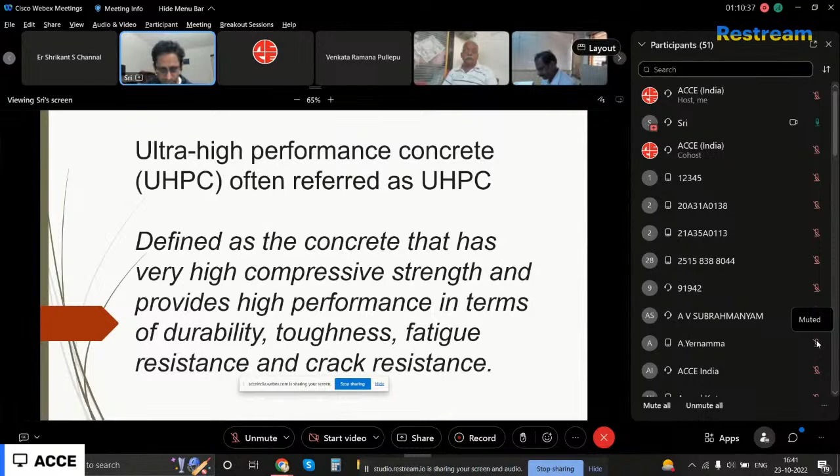So this is the statement I was trying to emphasize. It's relatively very new material. I mean, what is new in research, or what is new in civil engineering? Something that is 20 or 30 years back is not old at all. An idea that started 30 years back is considered new, even in French labs.

The reason is we are scientists. We want everything scientific and proved, and that's the job of researchers: to bring a new idea, test it out, verify the results, see its applications in different areas, identify the problems, and come out with solutions that mitigate them, eventually producing a concrete that is a lot better, and see if it works long term. Then the engineers and industry take it out and implement it on a large scale. That's how it works.

There is a huge gap in between these two. It takes significantly long, many years. Pre-stressing, we started using probably in the last 10-20 years, but pre-stressing was actually proposed around the 1950s, again by French people. It takes 40 to 50 years for people not only to test, implement, and verify it, but also to overcome the stigma of accepting superior new things, because we don't know them.

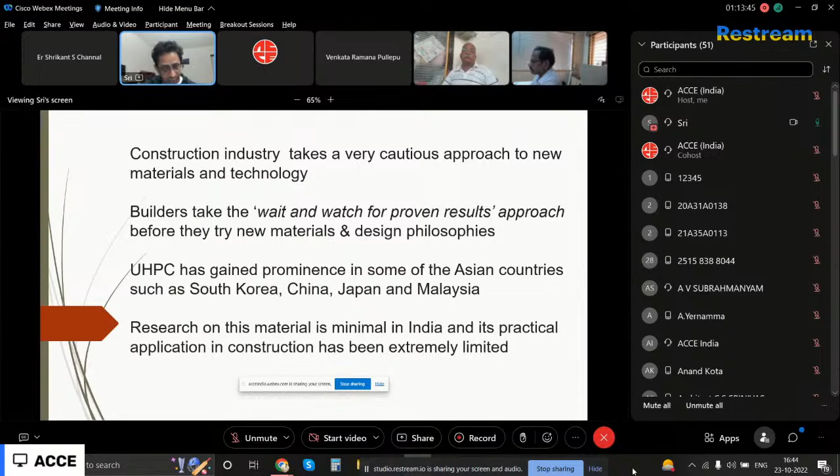This slide talks about what I already spoke. What was considered M50, achieving M50 was a challenge a few decades ago, but now we are already talking M125. Technically, as per the American Concrete Institute definition, for a concrete to be called ultra high performance, it's around M120—basically converting the units, that's about 20,000 psi, which is M120 grade.

That's where you technically call it UHPC. Otherwise, it's not UHPC, but it's probably not traditional concrete either. Traditional concrete definitions end around M50, M60. So you're falling in that zone between traditional concrete and UHPC concrete, between M60 and M120.

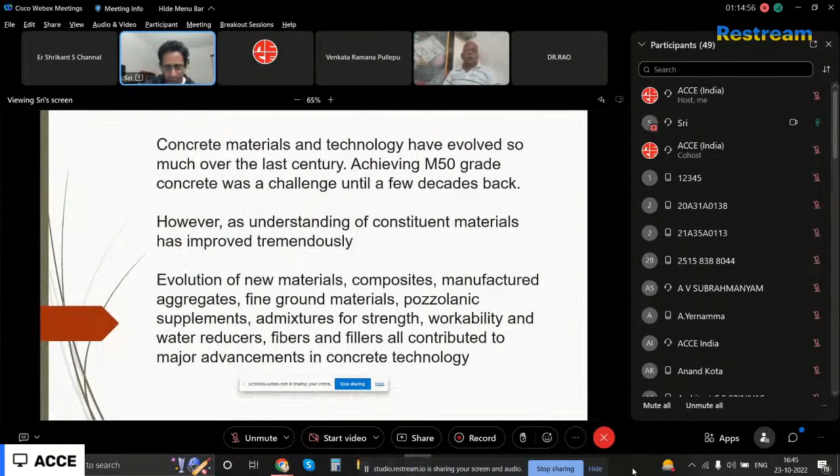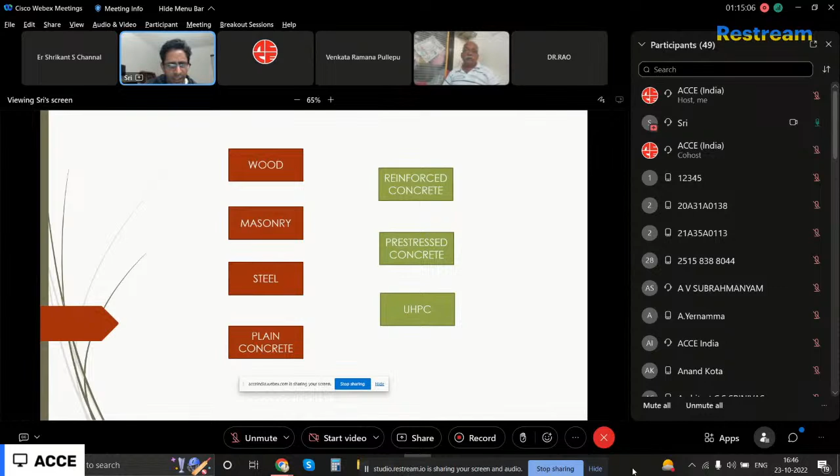Coming to the evolution—we can skip this, many of us know how we arrived at a point where we are talking about UHPC and these things.

Common ingredients: we all know cement, sand, water reducing admixtures. I think we have been using silica fume also in some mixes. Silica fume is commonly used to enhance the strength and properties of concrete—even mixes using M40, M50 also use silica fume. And then something interesting here is quartz flour. That's the important point right there.

When we see here, so quartz flour. You might be surprised that there is something missing here. Can anybody notice what it is? If you see this thing, common ingredients: Portland cement, fine sand, silica fume, quartz flour, water reducer, steel fibers.

What is missing here, essentially, from a traditional concrete? Aggregates? Yeah, the coarse aggregate. Yes, coarse aggregate. You don't see coarse aggregate here, essentially. So, it's not a formula I'm saying, but this is one of the most commonly seen mixtures for UHPC. So coarse aggregate is missing. That thing caught my attention actually.

Why are we missing coarse aggregate? Is it not added every time? I don't say it cannot be added, but adding coarse aggregate can potentially reduce the density. How good the pack is, how well it's consolidated into one piece, when you put all these materials together.

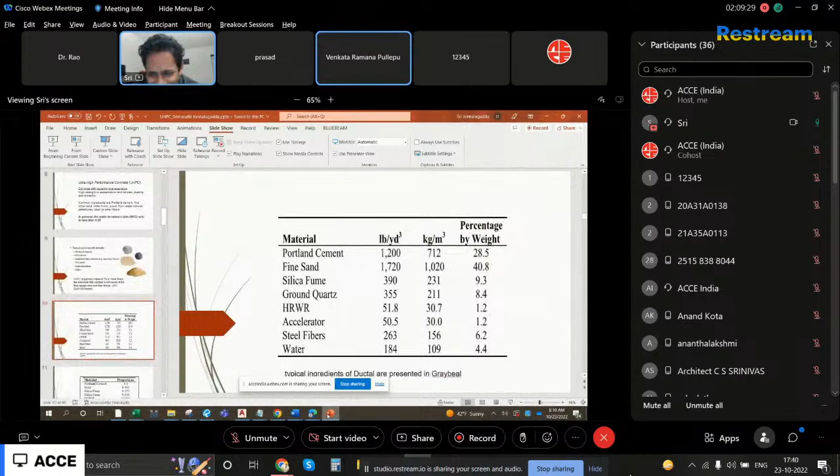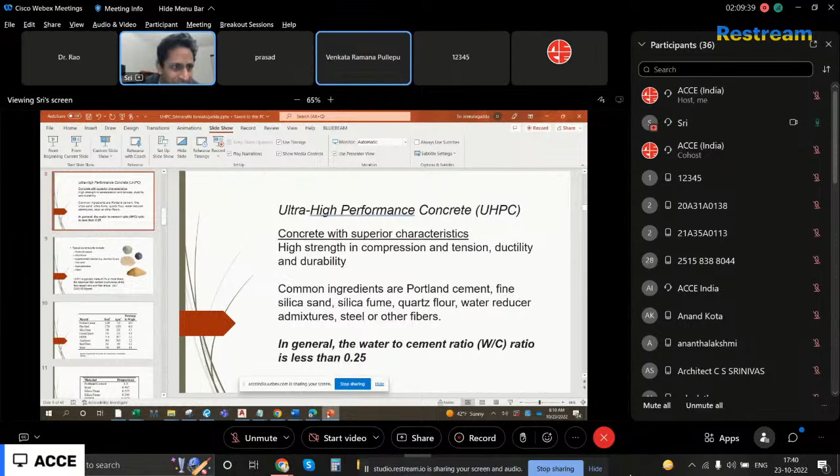If you permit me, I'll just very quickly go through it. I don't talk much into the slides, but I will just - okay, go ahead, sorry for the interruption. People will curse me, people will curse me, this guy didn't even talk fully about anything.

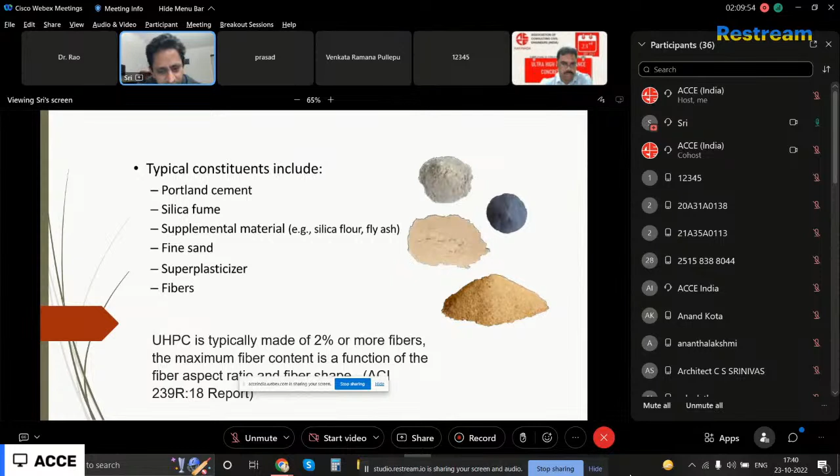So, 2% fibers - please, around 2% fibers is what many books typically refer to, 2% of the volume of the mix is something suggested. Then this is one UHPC mix, proprietary mix actually.

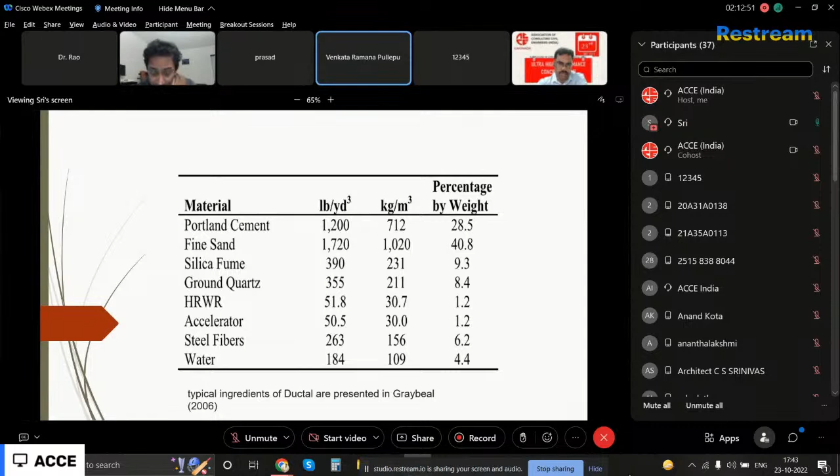I didn't know that, sir. Silica is a very polished surface, so it acts as a lubricant within the gaps of the particles. Besides that, it is in the amorphous form, sir. Yeah, glassy structure, highly amorphous form. Like a powdery kind of texture, essentially.

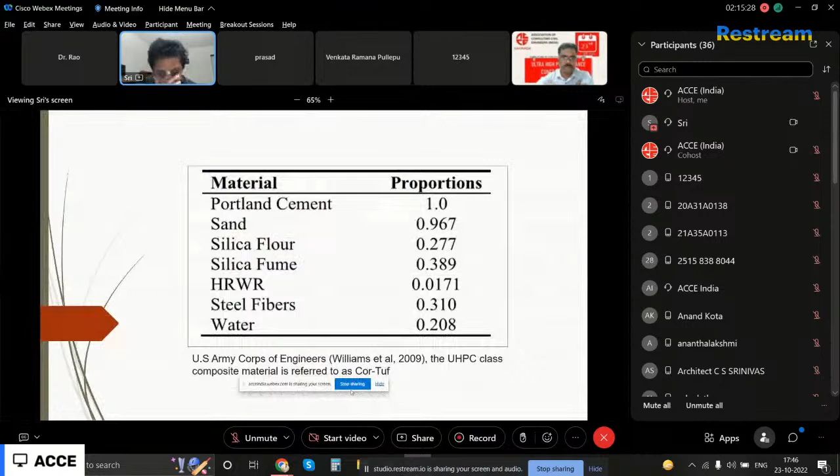One more advantage of this ultra high performance concrete, especially with the addition of steel fiber, is we can use it at a great advantage in pre-stressed concrete structures where we are thinking of getting a very high shear strength. I've recently seen somebody constructing a structure utilizing shear strength increasing it to about 10 Newton per mm square. When you increase shear strength of concrete to 10 Newton per mm square, your crack width reduces. Usually we restrict crack width to about 0.2 mm in pre-stressed concrete. This high shear strength lets us go for a slim section with reduced crack width.

There is one more advantage. Is this Mr. Prasad Garu talking? Thank you, Prasad Garu, you gave me an opportunity to skip to that slide. Actually, now I'm going to that slide because of you. So go ahead, I can just quickly go there.

That is the most important advantage from a designer standpoint, from an engineering standpoint, really. So I would talk a little bit about this slide before I go further. I want to talk about this slide, a very important slide.

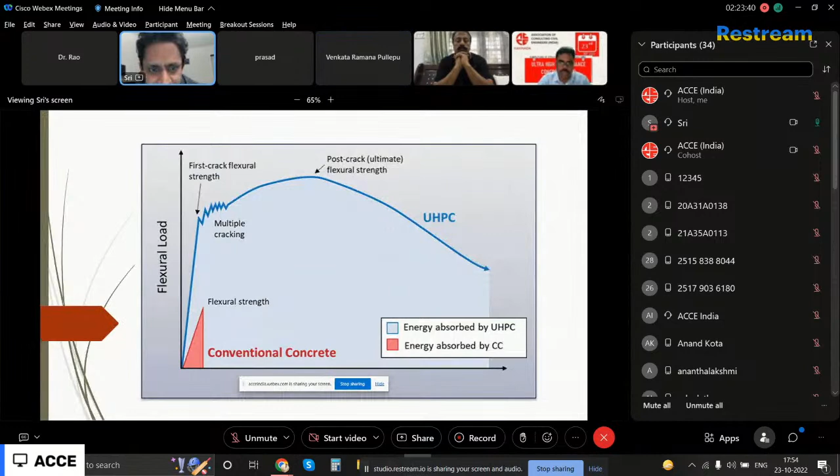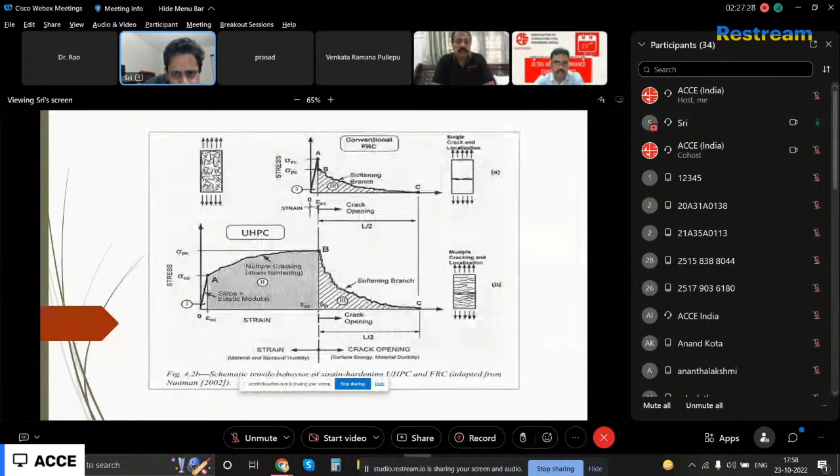It's okay, sir. I'll send you if I find that plot. No problem, in my literature if I find it, I'll send it over. I have written a paper on this one, I'll look at the paper also, that is much more detailed. I have a research paper on this one. I'll definitely send it.

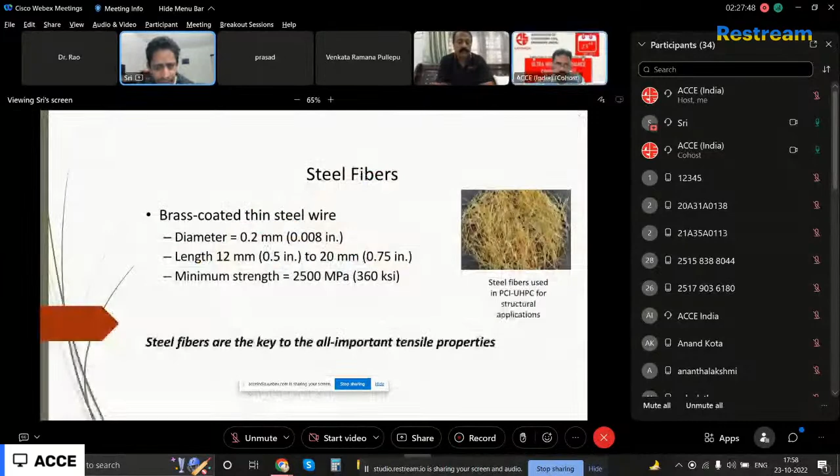There are a few questions in the chat box also, sir. One moment, before I just want to see. Yeah, this is, I think Dr. Rao Garu, you asked a question on what is the micro strain levels because of shrinkage.

Traditionally, you can probably have tensile stress before cracking, which is the most important part of a design to decide how much steel goes into the structure, which Mr. Prasad Garu, you were asking some time back. So how do you decide? Take it like approximately 2 to 2.5 times your tensile stress before cracking is more than conventional concrete, essentially.

So in conventional concrete, probably 600 psi, which is... give me 1 second, 600 psi is how many Newton per millimeter square? 600 divided by 145, you get around 4 Newton per millimeter square, approximately.

The permissible tensile stress in concrete is approximately 4 Newton per millimeter square. Given that tensile strength for UHPC is more than for high performance concrete, we can use UHPC for more slender members than traditional HPC.

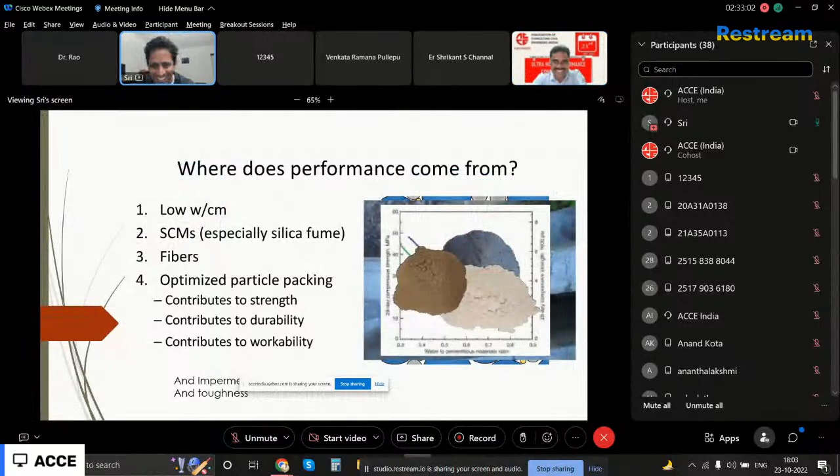Babu Mahesh has a bunch of questions in the chat box. Babu, you can call me anytime to discuss all these questions. People are waiting here, Babu. We don't have to follow a formula, we need to know everyone. Can I have a small last question from me? Yes sir, it's not going to ask the questions, we have the questions, only one small doubt.

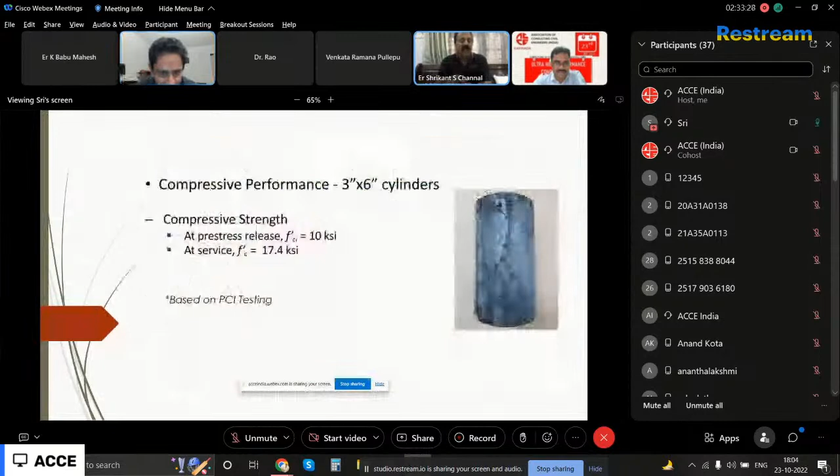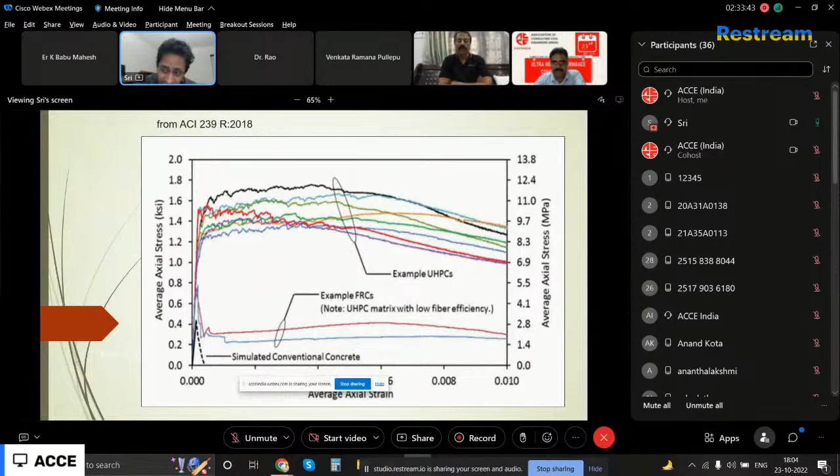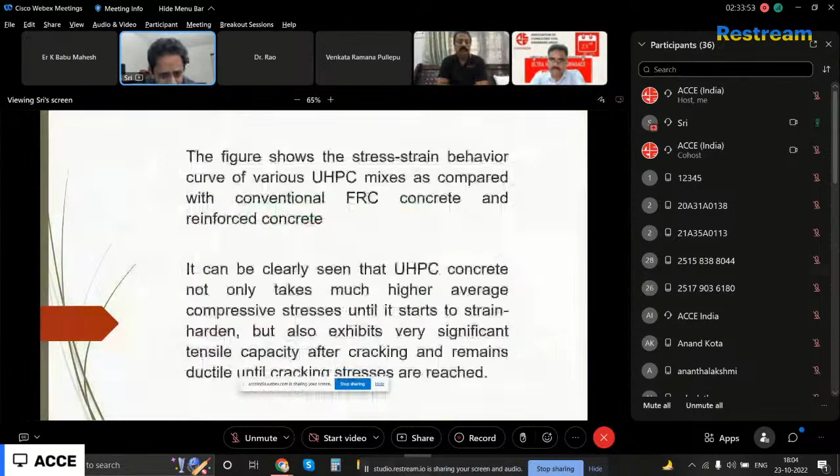You have shown that flexural curve, but did not show the tension curve also - is it available? This is the tension curve, sir - this itself. Okay, this is average axial stress. They didn't mention tension here, but this is tensile stress. On the right side vertical axis, this is tensile. This is flexural - stress deflection to flexural stresses. If I find the compression curve, I'll send that definitely.

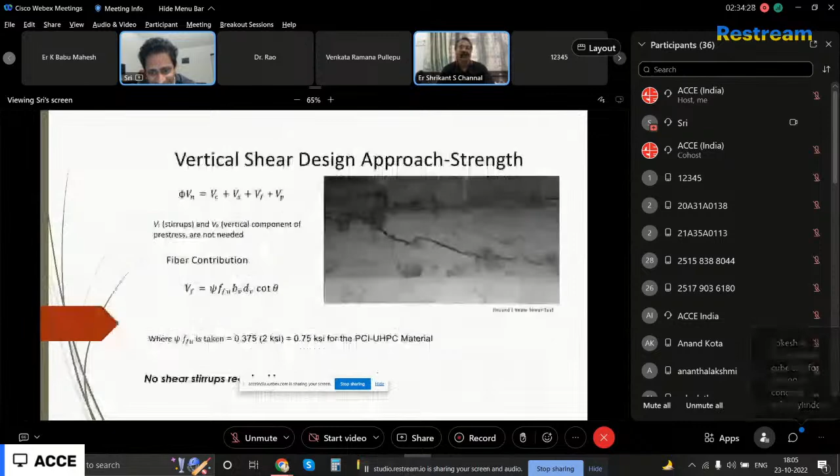Okay, fine sir, I think it is quite informative because it is going to be a new material and we all have to learn this thing. Otherwise we will not be having any alternative for the future - we will be thrown out of the field if we don't learn it. So it is good that Kakinada Center has chosen this topic. I am really thankful to Sundara Rao as well as the secretary. Thank you very much.

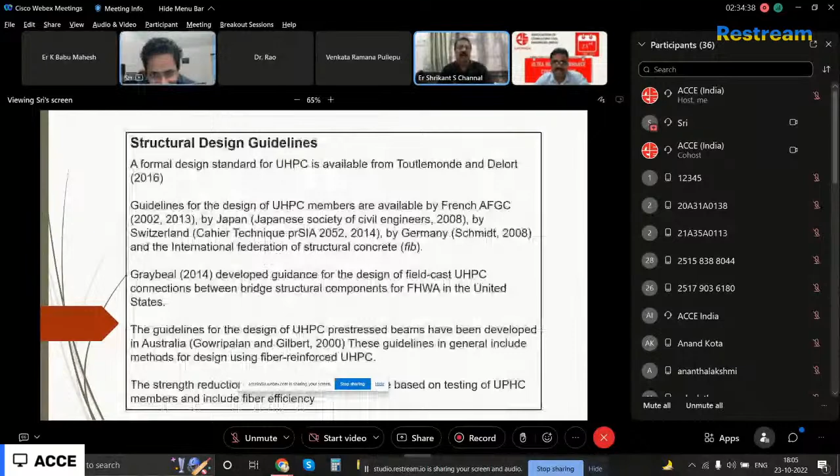I will be happy to go through it once again. Before, I didn't cover all the slides, and I'm sorry about that, because I don't like a boring, one-way presentation. I never liked it myself as a listener, and I don't want to trouble others.

Prasad Garu, Rao Garu, Ramana Garu, Shrikant Channal Garu, please, this one slide will answer all your questions. I have a last question, not really a question, just a doubt. Have you done any research on composite structure using UHPC?

Using UHPC, I did not do the research myself, but I have reviewed a lot of research done by PCI and some of my friends, professors in Alabama University, Dr. Smitharan. I really want to know what the composite structure using UHPC is like, and what the performance is like.

Comparison between HPC and UHPC, how thin it should be, or how. Very good question, Ramana Garu.

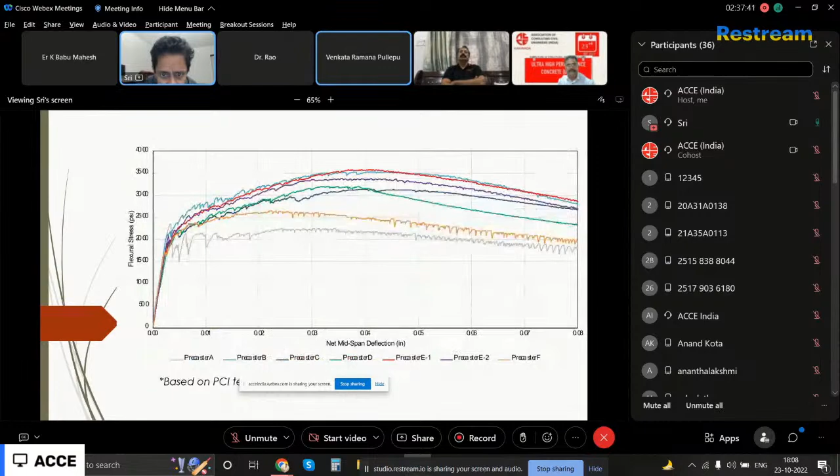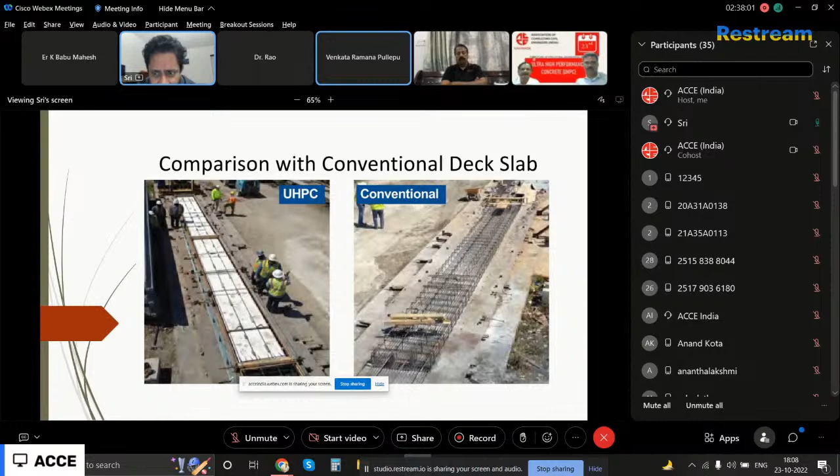My next question is, what about the carbonation of the concrete of the UHPC? Definitely, I would say when you use UHPC, you are producing more carbon, no doubt, because you are using a lot of extra cementitious materials, right? Obviously.

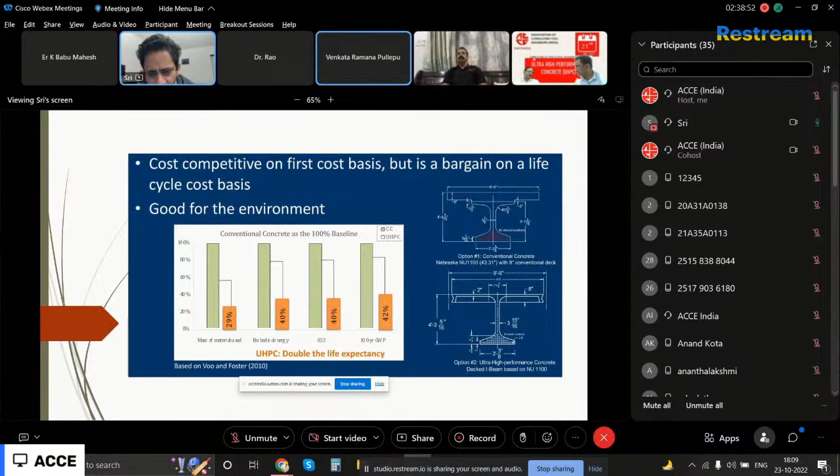With exposure to the atmosphere, what would be the carbonation? Like the ordinary concrete will have a very brittle structure after 10 or 20 years of exposure. So whereas with UHPC, do you have any research for that?

No, I'm not aware of specific research, but my simple common sense tells me that because this is impervious, a very highly impermeable material, chloride ingress is reported to be much lower. Corrosion ingress, because of that, moisture is reported to be very low. Obviously, I'm expecting carbonation also will be very low.

So that means hydrogen embrittlement, whatever the term is, I forgot it, will be lesser in the long run.

Yeah, absolutely, because it cannot penetrate the member easily. The penetration becomes difficult, getting into the core of the member, whether it's moisture, chloride, sulfate, or carbonation. The material's entry into the core matrix and its propagation itself becomes very challenging.

Yeah, because when we go to the bridge inspections, with, what is it, I forget the terminology sometimes.

We test the concrete. What is?

Hey, somebody asked me a question just now about mixing time of UHPC. Very good question, I couldn't... I said it will take, we can talk about this for months. Lokesh or somebody, sorry, I just saw that popped up on my screen. I want to talk about that one. Mixing time is very challenging for UHPC. Extremely challenging part for UHPC is mixing time. I think who is that?